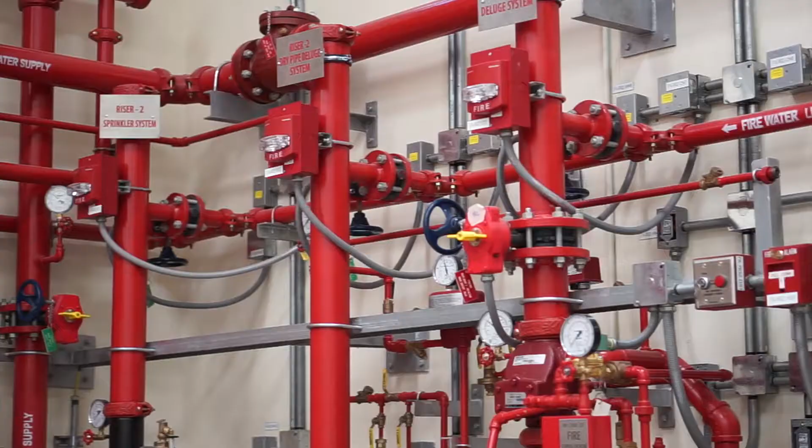Jubail Industrial College, committed to filling industrial training needs, identified the requirement for fire prevention and safety programs in the kingdom, as no such programs were offered by the educational sector. Saudi students had to enroll in academic institutions outside the kingdom to pursue these programs.

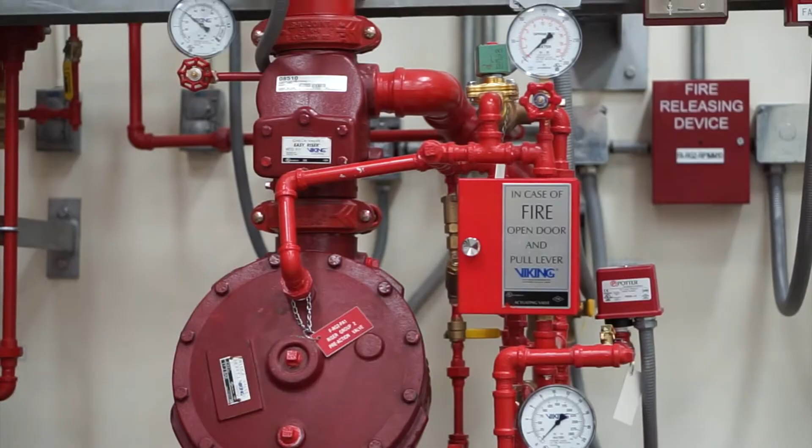A survey was conducted with industries wherein 97% asked for such programs, distributed as 38% highly required, 46% required, while 13% somewhat required.

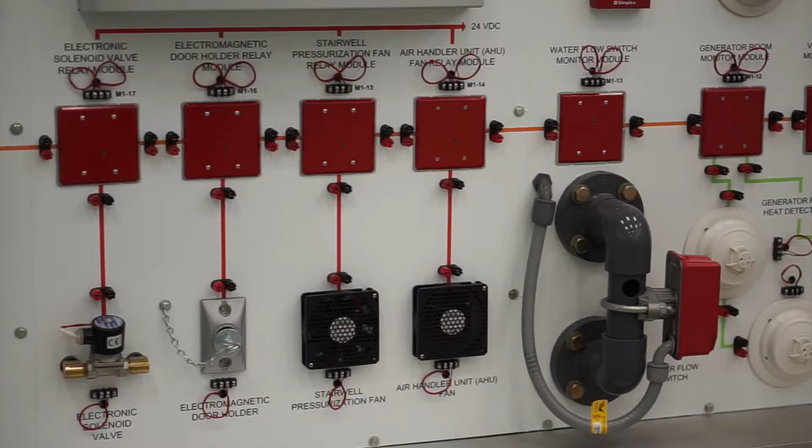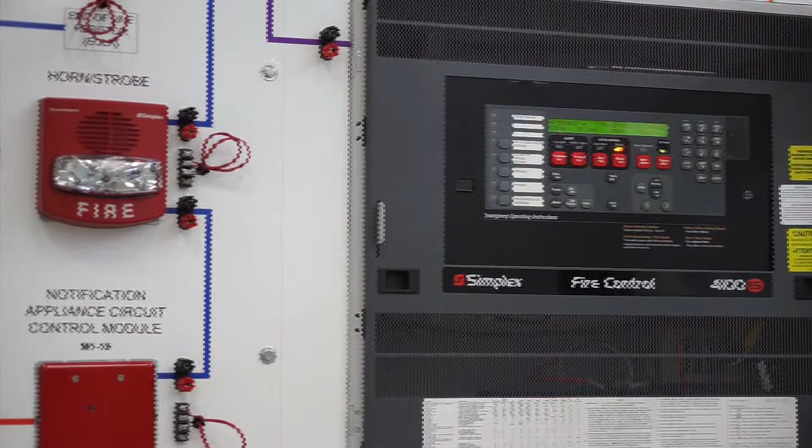Furthermore, engineers and professionals working in fire prevention and safety are looking for certification programs that can offer professional recognition and the needed educational qualification and status to work in fire protection and safety of lives and assets.

The professional alignment of fire certification programs is achieved by benchmarking with the National Fire Protection Association, USA, the US National Fire Academy on Fire and Emergency Services Higher Education Model, and the Institution of Fire Engineers, UK. The alignment of safety programs is done with the leading professional body, the Occupational Safety and Health Administration, OSHA, USA.

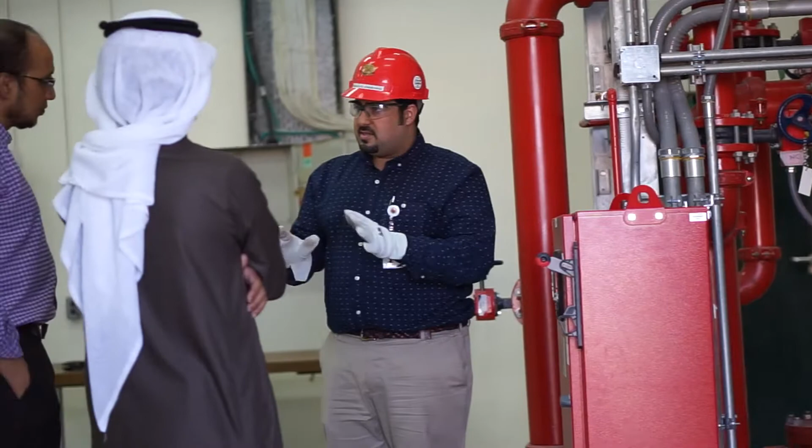Jubail Industrial College has acquired state-of-the-art lab facilities to provide hands-on skills for trainees with various types of fire protection systems, including the Fire Protection Hydraulics Lab, aimed at providing hands-on training on fire pumps and various types of sprinkler systems.

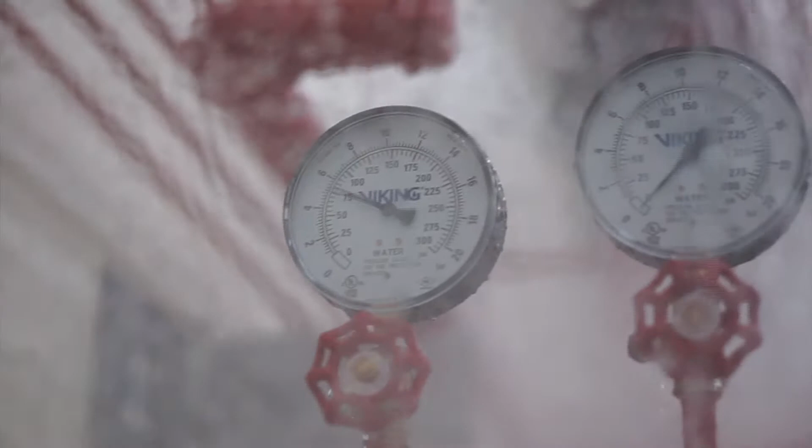The lab has two zones. Zone A provides hands-on training on wet, dry, double pre-action, deluge, and foam water deluge systems, while a water mist system will be introduced soon. Zone B contains two pumps, a fire pump and maintenance pump, connected to a tank providing demand to sprinkler risers. The risers are extended into a spray booth where trainees experience the operation pattern of various types of sprinkler heads, which are integrated with fire alarm control and fire alarm releasing panels.

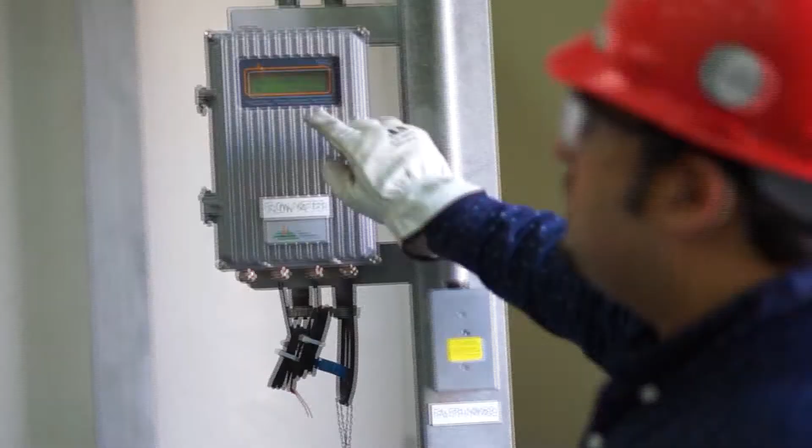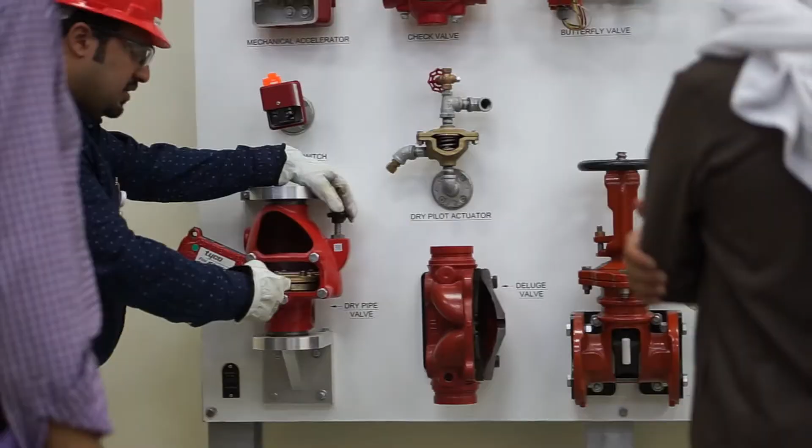The scale of training is wide enough to cover everything from introduction to the level of designing, inspecting, testing, and maintaining these systems. The systems and labs are benchmarked with National Fire Protection Association standards, NFPA, and training modules will cover those standards as part of the training.

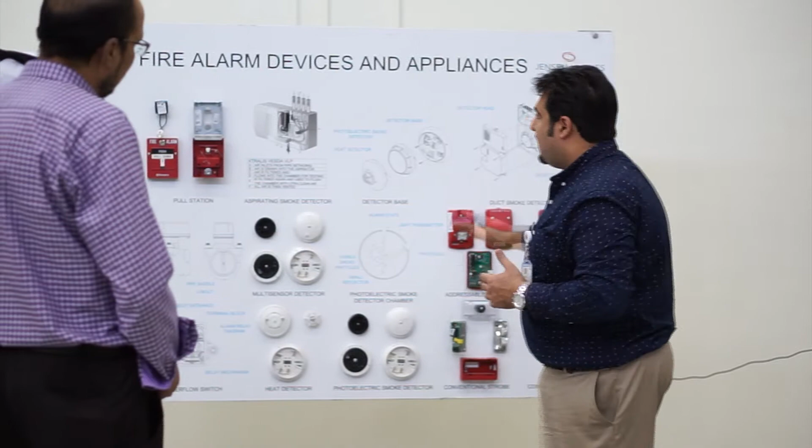Fire Alarm Signaling System Lab: GIC has inducted a Fire Alarm Signaling System Lab with the latest fire alarm technology produced by Simplex and designed by Jensen Hughes. The system includes hardwired fire alarm control panels, FACP, including multiple classes of wiring with intelligent and conventional designs.

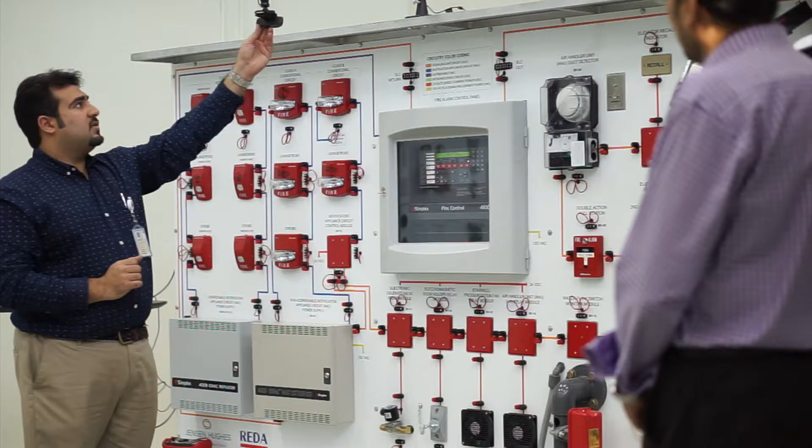The system includes connections to multiple types of detection and initiation devices for hands-on training, and is provided with a fault simulator where trainees can be deeply engaged in troubleshooting major system faults.

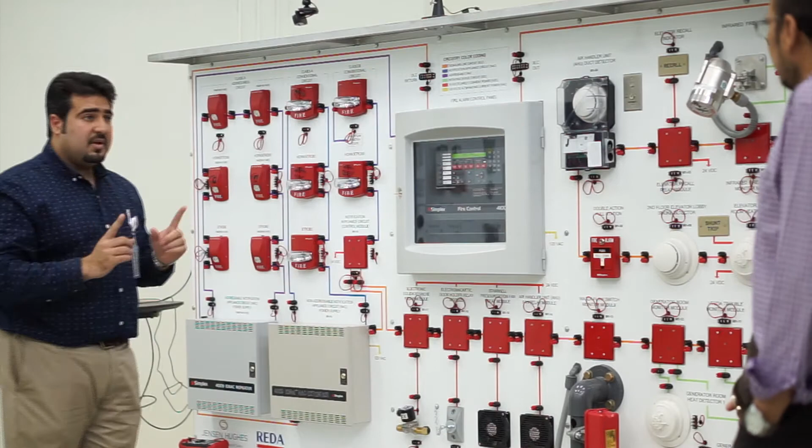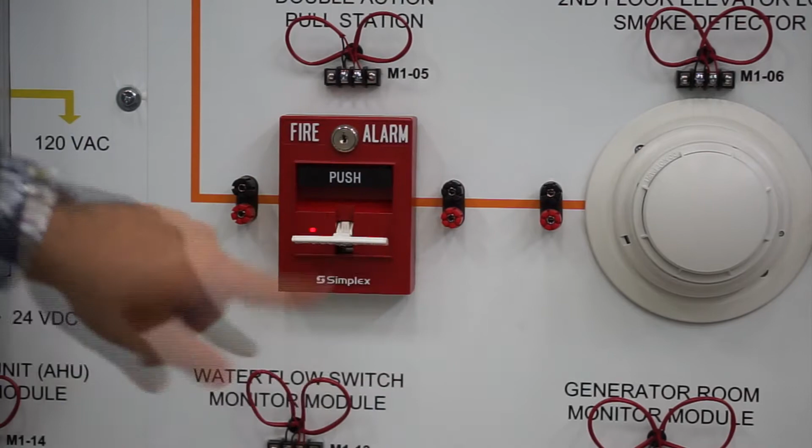A danger management system is provided to monitor all the fire alarm components and troubleshooting activities. An installation board is provided to guide the trainee on how to practically install, wire, and program new devices.

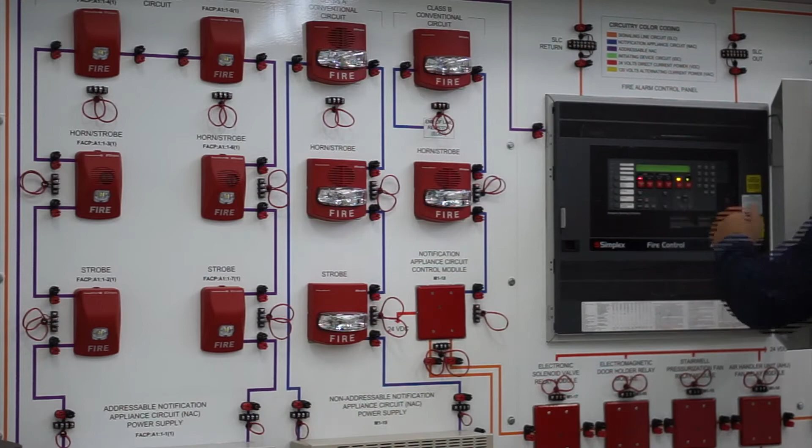The trainees will be taught on the basis of NFPA 72, the NFPA document for fire alarm signaling systems. The trainee will progress from introduction of devices, panels, notification, and circuit wiring to a level where he will be able to design, install, accept, test, inspect, and maintain system units.

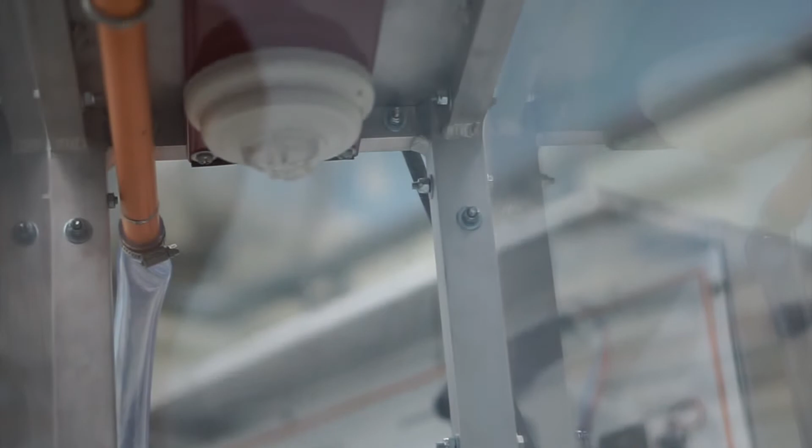The labs are provided with two demonstration boards that include cutaways of various water-based suppression devices, valves, flow switches, sprinkler heads, and other components, as well as fire alarm detection devices and various models of smoke and heat detectors, so that students can observe the internal workings of such devices.

In addition, cross-sectional areas of different piping materials could be provided for visual analysis.

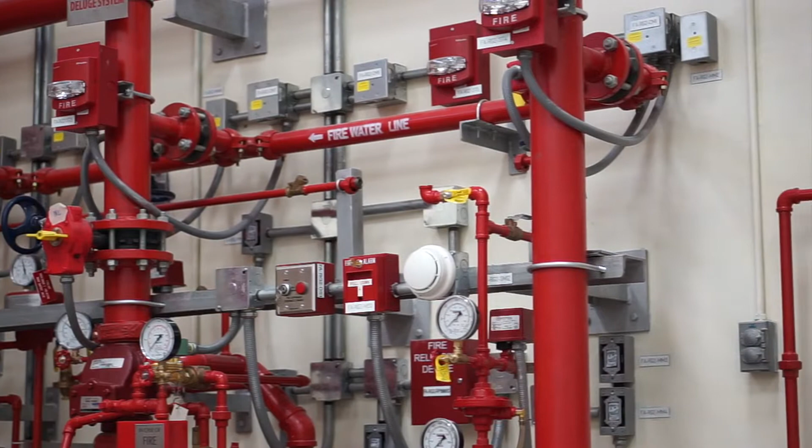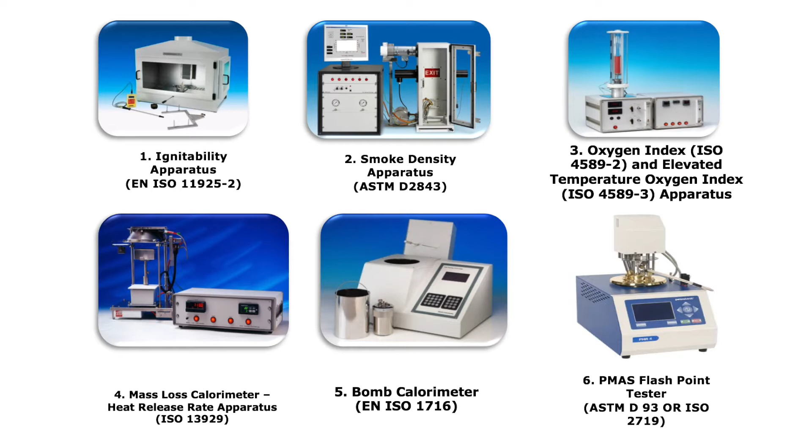Fire Combustion Lab introduces the philosophy behind the physics and chemistry of fire and combustion. A wide range of sampling and experiments will be conducted, including smoke movement, smoke density, heat release rate, and flame spread rate. The lab introduces the elements that may affect the designing, placement, spacing, and position of smoke and heat-sensitive elements such as detectors and sprinkler heads.

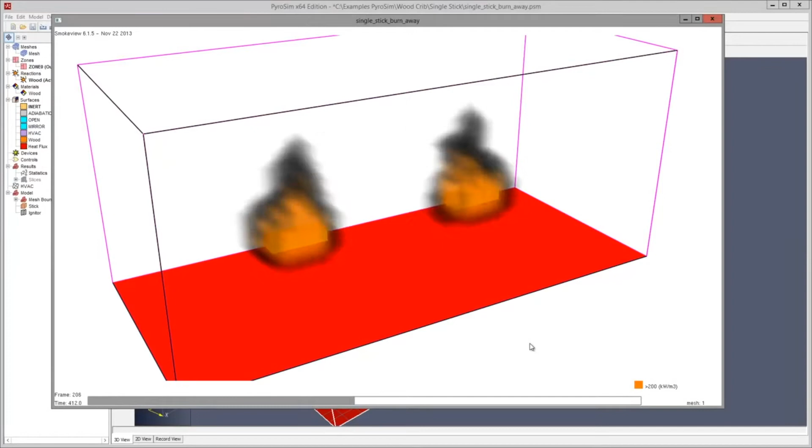Fire Protection Design Lab is a computer lab to provide design experience in various water and foam-based fire protection systems using simulation packages like PipeNet and Elite. The students will also be trained on smoke spread modeling, fire spread modeling, fire safety devices modeling, and combustion products modeling using Fire Dynamics Simulator.

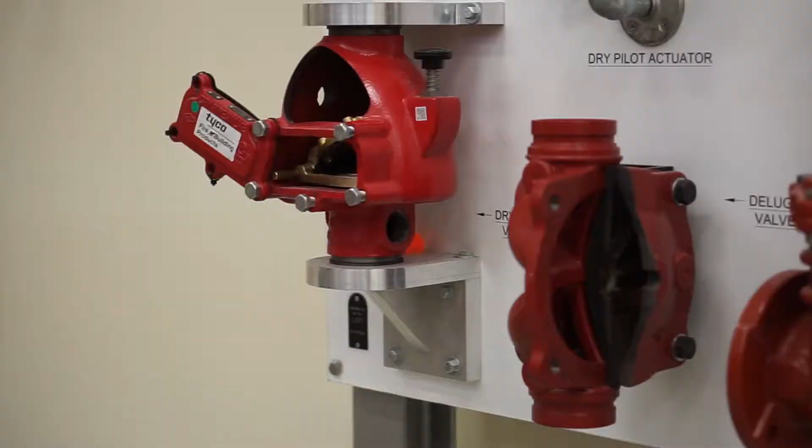JIC Fire Engineering certification programs are very broad-based credentials acceptable to multiple levels of career fields. The Fire Engineering certification program provides credentials to professionals in any capacity with a job related to fire protection, for example property and insurance, loss control type industries, engineering background, fire service, facilities management, healthcare, aviation industry, and regulatory authorities.

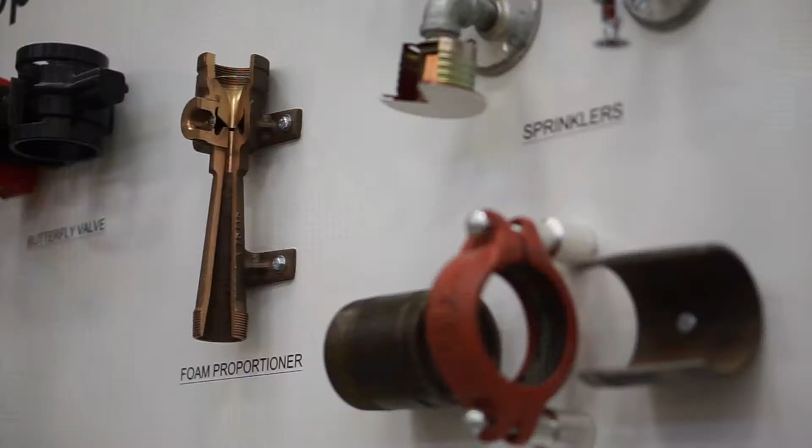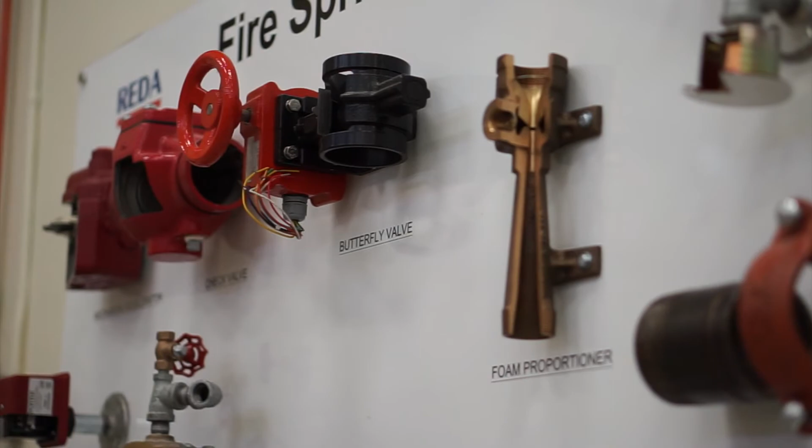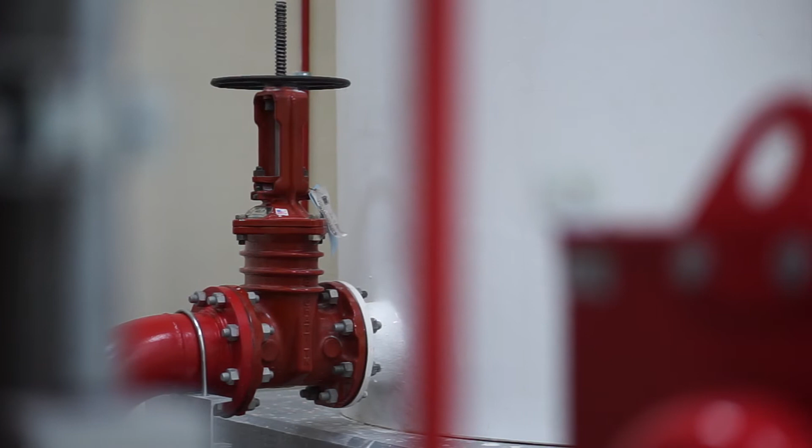Generally, the program contains a wide range of training modules covering causes of fires and ways in which they could have been prevented, use of fire prevention equipment and techniques, fire suppression systems, use of fire codes and their standard interpretation and compliance, inspection of buildings or building designs to determine fire protection system requirements, inspection of facilities or sites to determine if they meet specifications or standards, design of fire detection systems, alarm systems, and fire extinguishing devices, and plans for the prevention of destruction by fire.

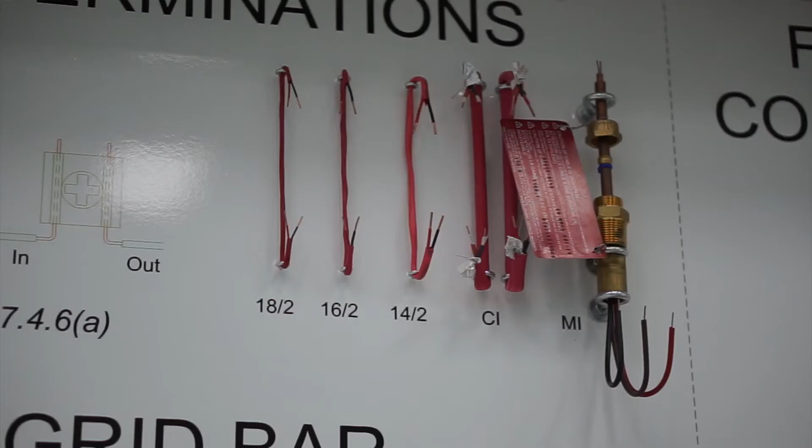Fire Safety Engineering Certification Program is aimed to qualify engineers and technicians through 12 weekly modules that are designed and developed in consultation with industries. The modules will be scheduled throughout the year to facilitate working professionals attending at their ease.

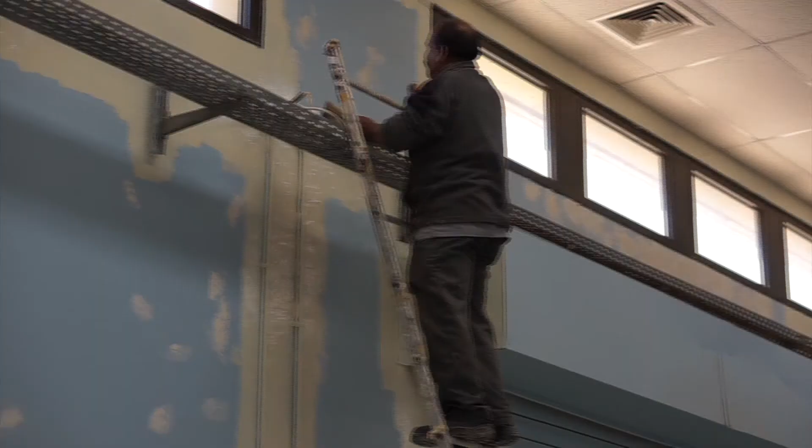JIC Safety Officer Certification Program offers occupational and health safety professionals additional education and professional recognition. The program teaches the art and science of engaging technology and people together to make sure that the workers are reunited with their families at the end of the day.

The program explains the theories behind what a safety professional knows and what they apply in their workplace. It covers everyday aspects of safety at work. For example,

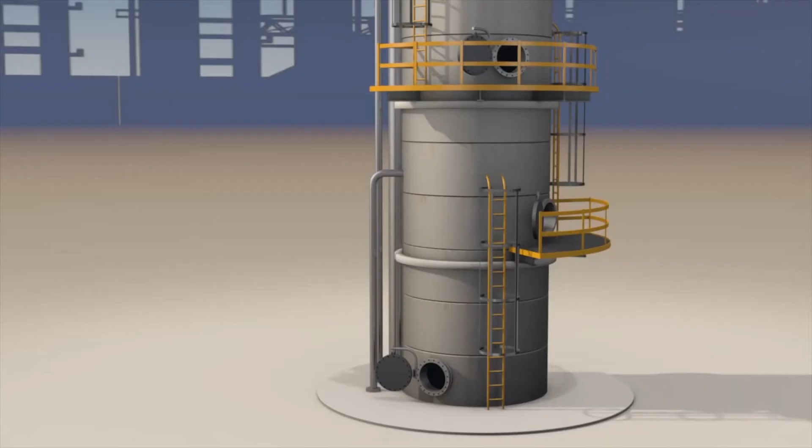working at heights, confined spaces, examining hazardous material, auditing hazardous waste sites, developing and maintaining hygiene programs such as noise surveys, continuous atmosphere monitoring, ventilation surveys, injury management, safety practices in industries, on-site health and safety audits, and conducting safety training and education programs. The Safety Officer program is designed with 11 weekly modules that will be scheduled throughout the year to make it convenient for professionals and employers.

The certification programs and courses in the Training Center will be delivered by trainers with professional certifications from the National Fire Protection Association, NFPA, and OSHA, the Occupational Safety and Health Administration, USA.

Jubail Industrial College: future leader for fire and safety training in the Kingdom.